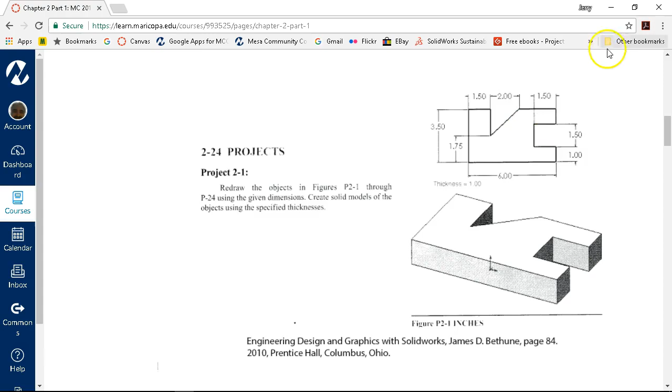So when I look at this project 2.1, I just see the rectangle and a couple of shapes knocked out of it. This lends itself to contours and regions pretty straightforward, pretty easy. So I'm going to go ahead with that strategy.

And it was an inch, so I'm in my template. One of the advantages of the template is that I've set my origin, so it's showing up in blue. I have that reference - that's the quickest way to tell that I'm not in a sketch, that it's waiting for me to do something.

Right click on the front plane, go into the sketch, and first part is the rectangle. And then I'll just be different - I'm going to hit L on the keyboard and sketch the other geometries. By this point you should be getting kind of used to the free form. Just throw a sketch up there, get some line geometry going, and as you put in the dimensions, let the sketch come back to you.

All right, so I'm pretty close on my numbers. I'm really not going to chase them that closely when I'm doing the sketching, because the dimensions will take care of that for me.

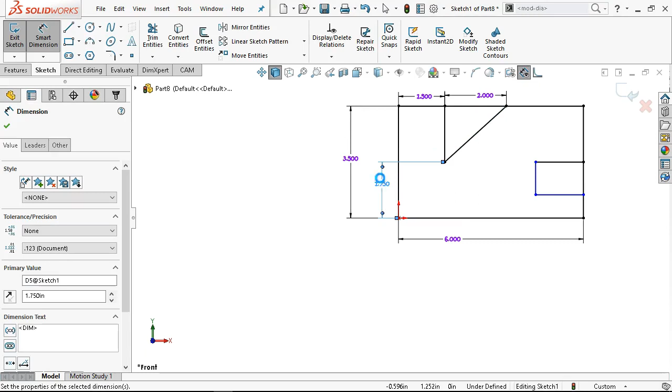Oh, and I do see that I need to go back into my template, and the fun pick that I did for the font is finally getting to me. So, dimension.

Selected dimension is driven. So let's go ahead and undo that. See what I missed here - 1 inch. Back into the smart dimension.

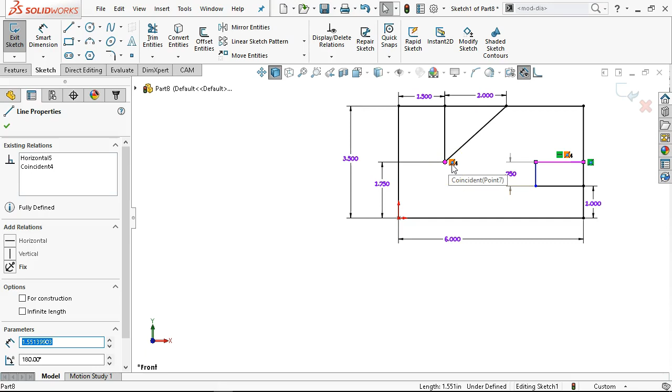Alright, so since that didn't come up with a modify box, and went for me, because I turned off or selected the do not show, what I'm getting is this gray extension line. What you would see is the pop-up box that says, do you want to make this dimension driven or leave it driving? So as soon as I see something like that, I want to check. Probably the most likely candidate is that I got a coincident to this point. So if I highlight and see anything else pop up that isn't directly related to that line or something that I intended to do, I need to make that relation go away.

So then what do I do with this dimension? Right now it's still going to be driven. I can delete it, but under other there is a checkbox to return it to driving status. All right, so in my what-if scenarios, I can switch between driven and driving on the dimensions to give me a tool to not necessarily have to pick one or the other - have one for reference, have one that is actually driving the geometry.

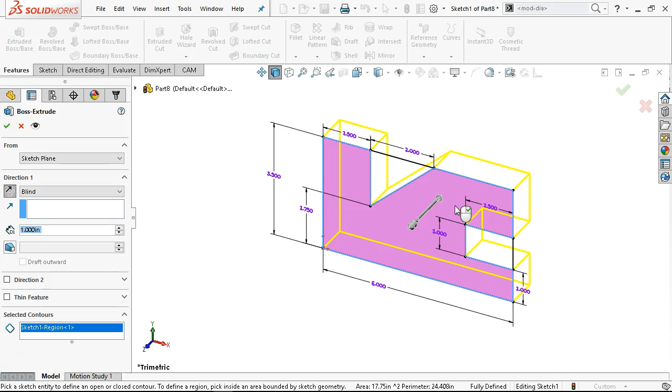And then let's see the depth, 1.5. All right, so at this point I would consider it purely optional to do the trim - if I don't have to, we'll go ahead into the Extrude Boss Base, pick the region, go ahead and drag out a little bit or set the direction depending on what we're doing. Again, the scale, as you get closer to the scale, will give you the numbers, but I'm not chasing that scale to 3 decimal places. At best, the 2 decimal places, and then it did snap to 1 inch, so we'll take the 1 inch.

And then we'll go ahead and save.

And I'll figure out where I saved. Alright, so at this point I've got a folder full of Chapter 1. This would be a good time to go ahead and make a folder for Chapter 2.

And I'll start saving to it. I'll go back into File Explorer, gather up all my Chapter 1 files, and put them into that folder. And so, 2-1.

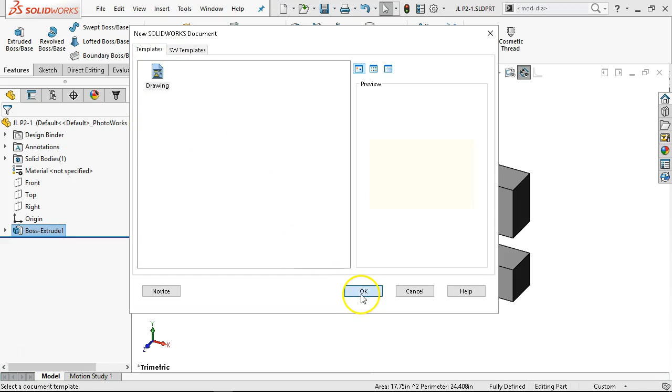Alright, taking this over into a drawing, if you want to go just single drawing at a time, make drawing from part. This is under the File pull down. Make drawing from part is a quick way. Let's stay with the default drawing template until we create one.

Alright, so again, if you have only show standard formats checked, you're only going to see the standard ISO. Uncheck that, and we'll pick landscape for this one.

Alright, so this will be kind of the accepted standard. To me, this is still taking up maybe a quarter of my sheet, and I don't really need all this information. So I'm putting eyes on the items I am going to use and things I would like to take away. As far as creating the drawings, at least initially, we're going to set a front view and then drag the other views into the mix and go ahead and accept.

The scale looks pretty good. In this case, I would probably shrink the isometric view just a little bit. As we scroll down through its property manager, we can see the scale is set to parent scale. Sheet scale would be pretty much the same, or we can put a custom scale. If that was already 1/2, then let's see, maybe 1/5 is a little small.

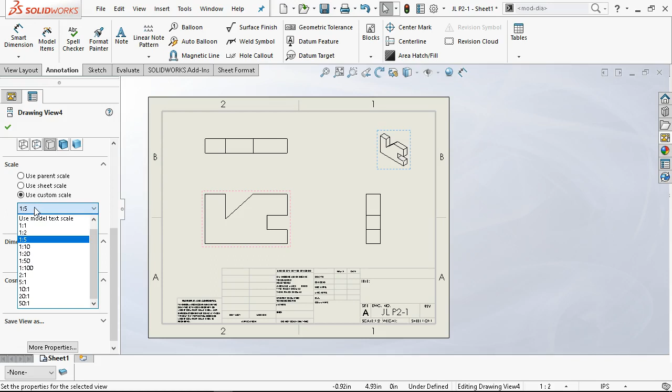And if I scroll up, I can go to user defined. User defined, there we go, make sure I click it. And pick any combination, so this time 1/3.

Putting dimensions on then is just like what we did in the sketch. So picking objects, and I'm set up still for the ISO view. Typically, if you're not going to put dimensions on a view, you don't really need that view.

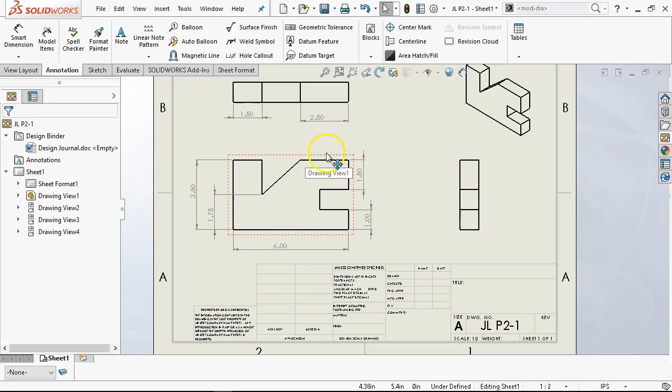And I guess my preference is still that I will have the hidden lines removed, mainly because if the drawing's not that complicated, I really don't want to see stuff that isn't going to help me. But then the other side of it is if it's really complicated, I don't want things that are going to be distracting.

If we wanted to switch to hidden lines, under the property manager again, display style, hidden lines visible, and because it will carry over into the child views, the other two views, then we'll get the hidden lines. So again, it's kind of a preference whether you want to use those or not, in my opinion.

We'll drop that one in, and then that becomes a drawing sheet. By default it picks up the same name as the file, or in the case of multi-sheet, the first file that you put into the sheet.

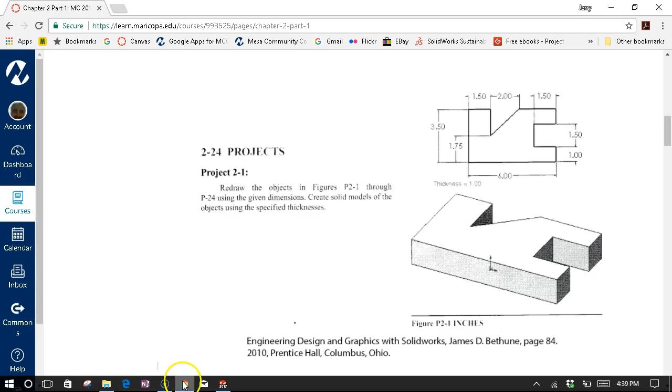Alright, jumping over to P-2-2. Kind of a strange shape. Can't really say that I would do the rectangle on this one. I think this is just going to be a bunch of lines, maybe the rectangle in the center to position. And this one is in inches as well.

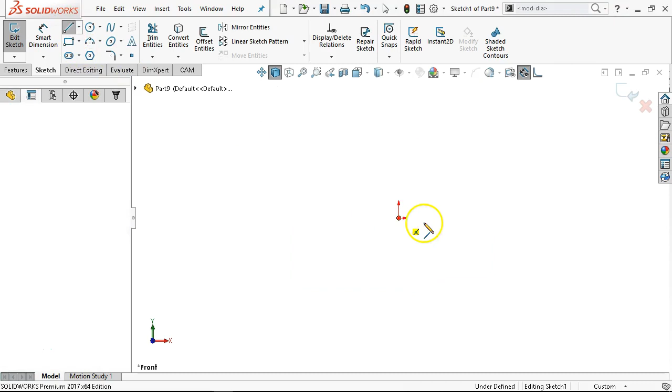And again, kind of pick a corner. So just to be different, I'm going to start on this corner. Alright, so it's kind of perpendicular, really about one of the only perpendicular lines in the group. So: over, down, over, angle.

Alright, if I'm watching those inferences, I'll pick up a few clues along the way. If not, then I expect that I will get a few relations that I'm not really wanting in the mix.

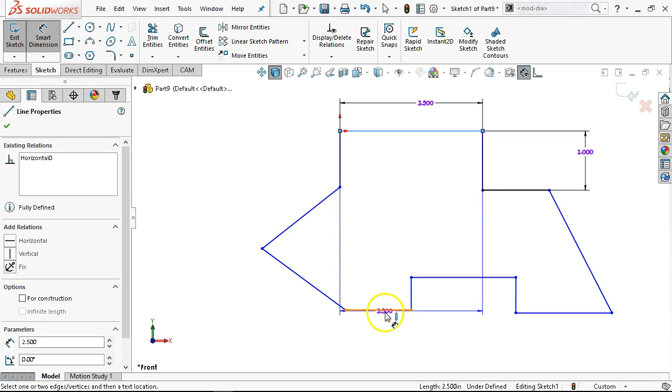Alright, so just dimension. And let's see, our overall was 4. Alright, so since I got a jump, I did not infer some relations there. So I could go ahead with the dimensioning, but the sooner I catch up to those relations, probably the better.

So again, my two choices are to select and control-select the objects, the lines in this case, and I will get a collinear relation. I could also go with the endpoint and one of the lines, and that would get me a coincident relation. Both of them will have the same net effect of causing those to share the same line, not move independent of each other.

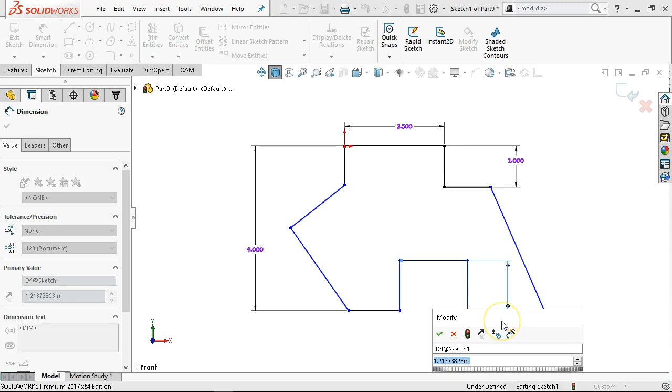Let's see, what do we have for an overall? Chain dimensions. Alright, so 0.53 looks like it. Since that was selected, that pretty much is what jumped out. 2 inches, 1.5, 1.5.

And then we get into the smart dimension, where if I stay close to the line, I get the linear. I drag down, I get the horizontal. I drag over to the side, I get the vertical. And then if we were to pick another object, another line, I would be able to generate the angle. But we're not given an angle, so we'll go with the linear distance.

And if I want to check for that angle, we can make the angle a driven dimension just so that we have it for reference.

And 1.5. All right, so what am I missing? 1 inch on this side.

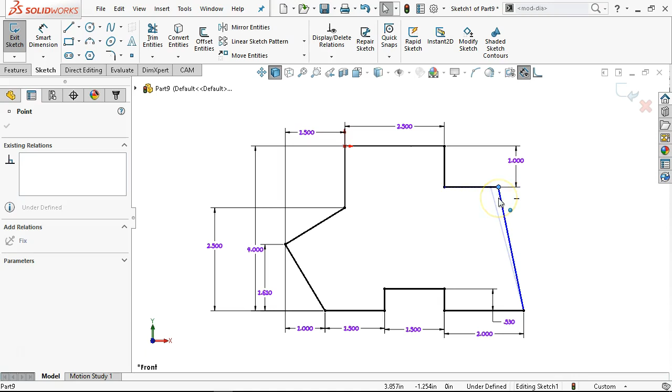So let's say that I didn't see that dimension for the 1 inch. Your best diagnostic tool again is going to be grab something that can move and see how it can move. If this was able to really rubber band, that would give me one clue. Since it only moves back and forth, I either need to look for a dimension or a relation to apply to that line or to the edge.

And then again with the four-headed arrow is asking for an extension. So if I were to pick one of those directions, that would give me an angular dimension. Don't quite want that one, so I'm going to hit escape to clear the point, and then come back to

1 inch. All right, so where that extension line is used, if I pick the point and I pick an angled line, and I say I want to extend, probably would be better along this edge as an example, but we can apply both of them.

That will place in one direction. If I go with that as a direction, then off of the linear, because of that four-headed arrow, because we're staying with the coordinate system, I can pick my angles without generating a construction line, a center line to reference to. All right, so 30.68,

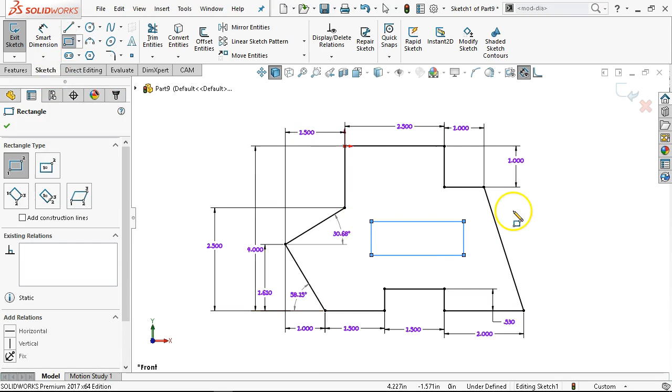58.15. Those are some interesting angles, but would really need to see what the geometry is doing to make the jump to 60 degrees, 30 degrees.

All right, so position on the rectangle, 2.5, 1 inch, 1.23, and 2 inches off of the tip. All right, so that's an interesting number.

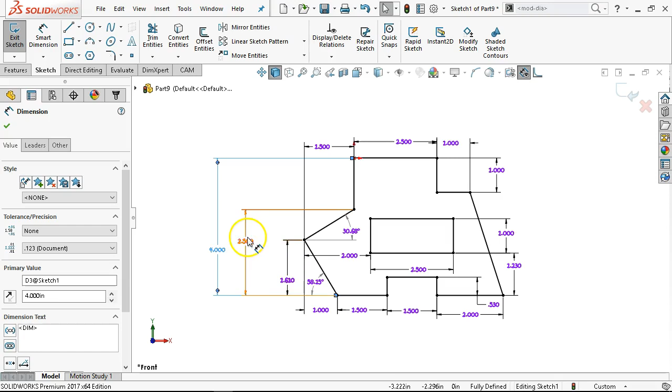All right, and again, you don't have to line your dimensions up any certain way. They should be readable. I should be able to pick pretty conveniently if there is something that I need to get into. But for the most part, wherever you place them, that's going to be fine in the sketch. Detailing is going to occur in the drawing.

Okay, and then this one is 5/8, 0.625 on our thickness. We'll save it, pick up the same naming convention.

Alright, so this time we'll go with the new drawing. Alright, so just opening up the sheet. Alright, so since this is a default template still, it's still going to ask for the sheet format and size.

So one thing to keep in mind is that I can go to custom sheet size, which 279, 216. Well, let's convert that over to inches, 11 by 8.5. And as long as I type in the IN on the end of it, it will be an inch. Except now I have a completely blank and not quite filling up the drawing view.

So if I go back to properties, again, if you don't show the properties on your right mouse button context, come down to the customize menu and make sure that properties is selected. I use that one enough. I like to see it there.

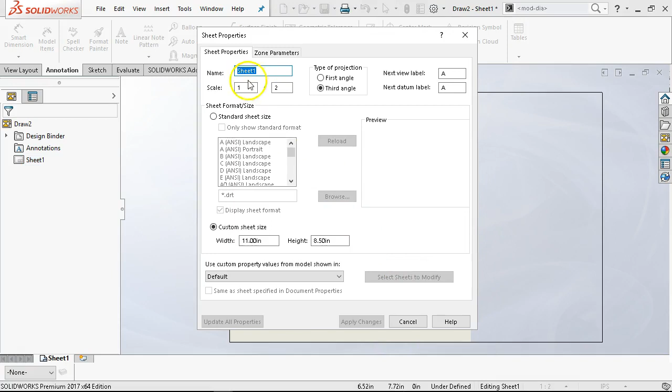So what that's going to do is let me back into this sheet properties, and I can double check that yeah, I did create the 11 by 8.5, and whatever it came back for in the inch to metric translation, the screen hasn't quite caught up yet.

So let's see what that does if we go to View Layout, pick a model view, and then that is the currently open drawing.

I have the start command when creating new drawing unchecked, so that most of the time we'll be using the view palette. When this does come up, I'd like you to be able to recognize it and know what it's doing. So, or if you prefer this method, then you would go back and check that box so that this opens automatically whenever you create a new drawing.

Alright, so advantage here is that I'm going to create multiple views, pick the views that I want. Don't need the trimetric. That was where that came from last time. Set the display style, and we're going to stay with the sheet scale. And go ahead and accept.

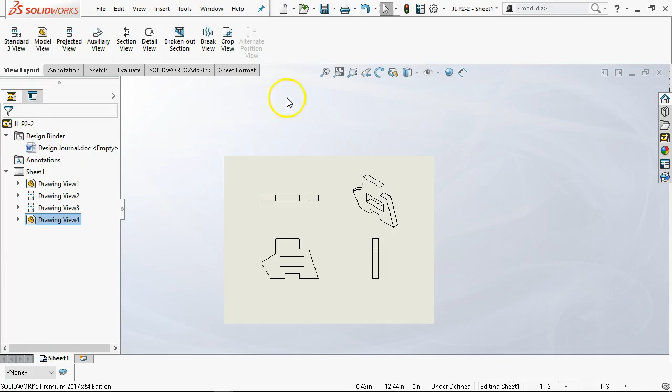Alright, so since I'm on the blank drawing, I don't really have anything to reference to, and with a 1/2 scale, that may be why.

Now it went out to 16, 29, yeah. All right, so we've got some scaling going on there. So be careful with the sheet scale. I'm going to have to do the conversion for the 215 and the 279, see what it came up as. All right, so we'll come back to that one when I figure out what I actually told it to do there.

All right, so we can close those out. All right, going into the next one.

If you have the 2010 book, this drawing was for like 223. I copied and pasted this out of the 2014 book so that you'd have reference.

So these got kind of mixed up in the text. And if my mouse will cooperate here, looking at this, we could go either way with the rectangle and a couple of notches, staying with the regions. Probably about as fast to go ahead with the sketch.

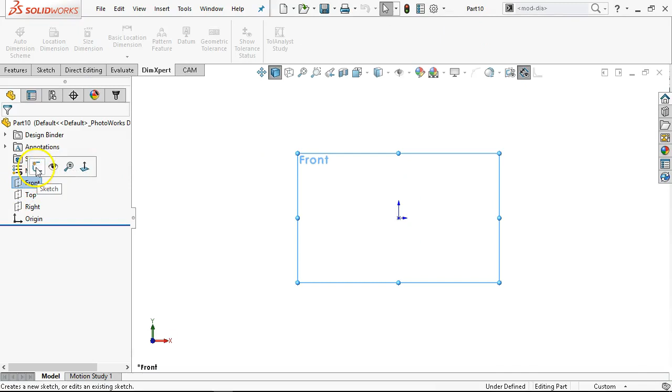All right, so bottom left corner, and really the point that I wanted to make earlier about picking a location, whatever looks good. I mean, you're not locked into having to put every one of these parts on the lower left corner of the part.

If you pick or experiment, or have a good reason, or even not a good reason, to place the origin someplace else, just experiment with

what can work there. All right, so I'm looking for that inference line. Back to the origin, and then up, over, back, and down, looking for the other inference line.

And from last time, I know that I didn't quite get coincident, but that particular inference line put me coincident with the origin. And then that other inference line also coincident to the origin. So now if I try to move this line, it will go back and forth, not up and down.

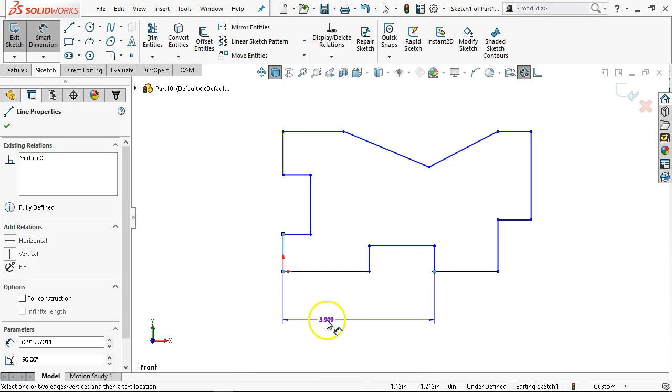So in that case, I was able to, as I was going through the process, have the software infer as I went, but that's not always going to be the case. So just be prepared to go add relations as you need them, and apparently the origin is still selected, or something's still selected.

All right, and our dimensions then: half inch, 2 inches, and there was an inversion, so let's see what it does when it goes to 3.5.

All right, so a few strange things going on, but not too bad. Overall of 6 inches.

So as I'm adding these dimensions and it's doing a few strange things, we're just kind of going through the process and letting it catch up.

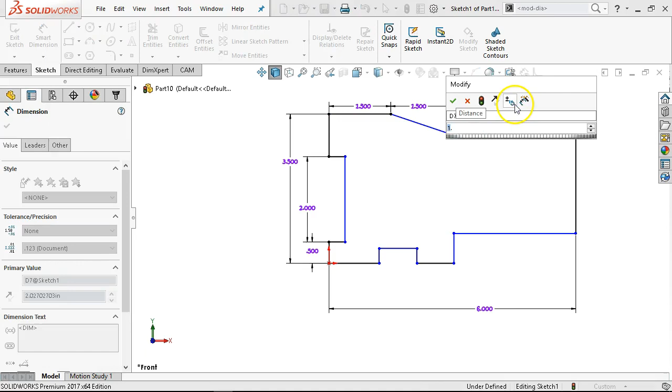All right, so both of those were 1.5. So just double clicking on the dimension gets it back. 1.5, and then a depth of 0.75.

All right, so there's one that didn't quite make collinear. What do we have? 1.75. And the small dimension, 0.5.

And 2.25, well, in here, so go ahead with the 0.75. And then the 2 inches. And 1 inch for the height.

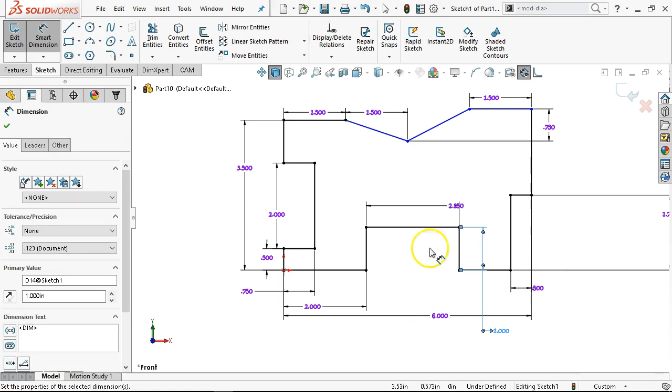Okay, so at this point I think I've put in all of the dimensions, even the ones that got thrown out. And looking at this as a movable item, right? So it moves pretty much the whole thing up and down.

So this is another place where I would be looking at collinear. So instead of the endpoint in the line, I'm going to go line to line. And in the pop-up box, we'll go with make collinear. That brings it to fully defined.

And our thickness here, not given, so make one up. And we'll save that.

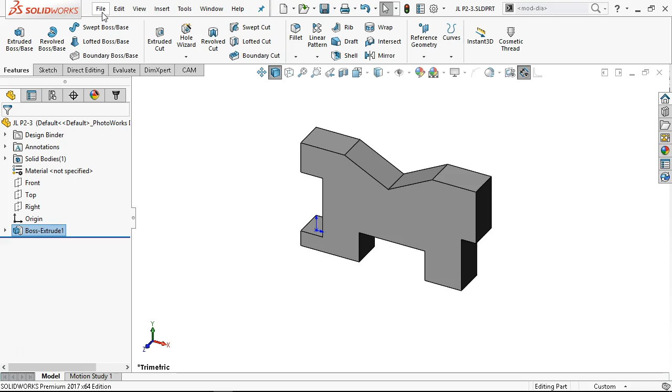Okay, so let's see, we had the two. So I think probably more out of habit, I will end up in the new for the templates.

And the drawing will stay with the standard sheet size after last time, and go ahead with it. And then let's see, we did the view layout model view, which is the same as insert drawing view model.

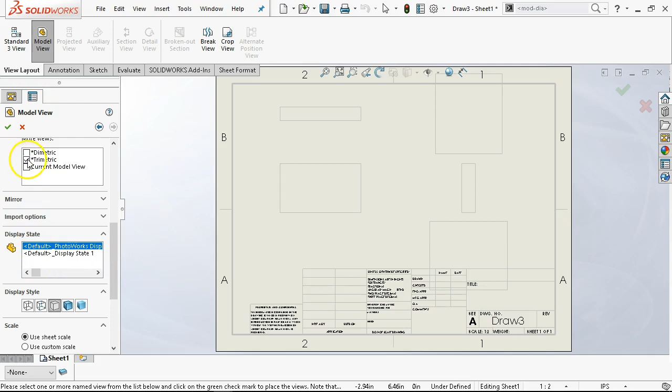Right, so basically the same exact command, just a different way to get to it. And we're going to create the multiple views. Pick the four. I wonder why the trimetric is staying active on mine there. And go ahead and accept.

All right, so even if I don't need all these views, I decide that I can place the dimensions, and I really didn't need the right view. Highlight it so that it's in orange. Hit delete on the keyboard.

It'll come up and say, 'Are you sure?' And then it goes away. If I decide I need it back, well, at this point I could hit Control Z.

If I don't put it in there, then probably the easiest way to create the next one is going to be a projected view. So off of that front view, I can do a projected view, and this will set the alignment. All right, so the front view is always the primary or the highest level view.

The right view and the top view will follow it. The top view is able to go up and down, not left and right, so it maintains its alignment. The right view can go left to right, but not up and down, so it also maintains its alignment.

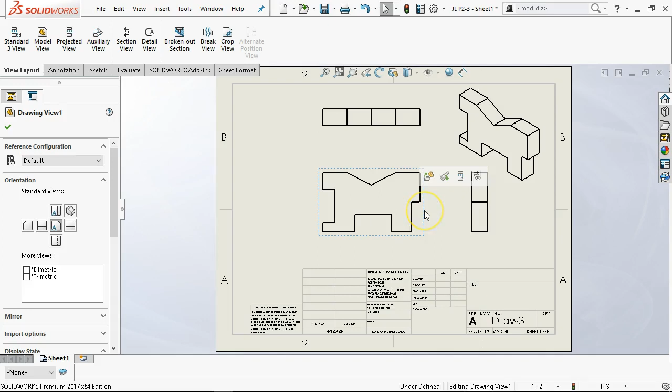If I created just a new view by selection and did not place it where it was going to be projected or pick up the alignment, I would have to assign the alignment manually.

So let's see how I can generate one of those. I pull up the view, let's grab a left view. There's the preview showing me that it's going to get alignment, I see that dashed line. If I place it anywhere else, it's not aligned.

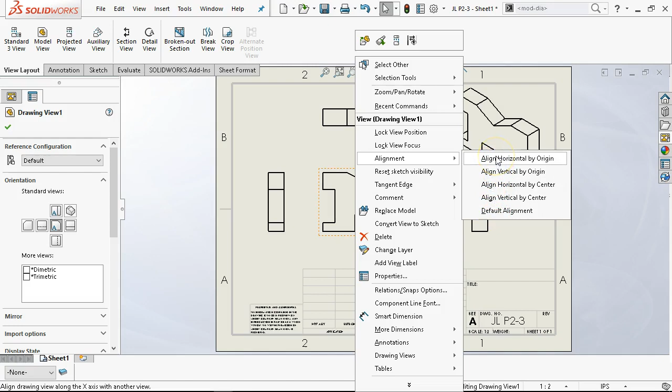Okay, so I get it close, and then I select which one I want to be the primary view. For the alignment, there are options: align horizontal by origin, vertical by origin, horizontal by center, vertical by center, or default. Probably in this case horizontal by origin, then pick the view, and then one of these moves.

I got it backwards, I made it so that this one is the primary and the others are following it. So just be careful with the alignment. It's not that big of a deal, but it can have an effect.

All right, into the annotations. We talked a little bit about the purple dimensions. So under model items, I have a selected feature, and I want the entire model.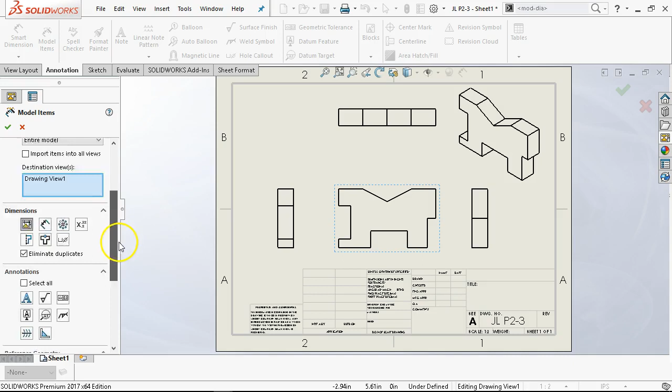A lot of times this comes in as just a big blob of dimensions. Since I have not marked any for drawing, I don't expect anything to come in - but this is where I would see those. No dimensions are inserted, and if we go back and pick up the model items again, they're not marked for drawing.

Okay, all of the dimensions that I included in that view - since there was one sketch with all the dimensions, that was convenient to draw it that way, but it does not make it convenient to manufacture.

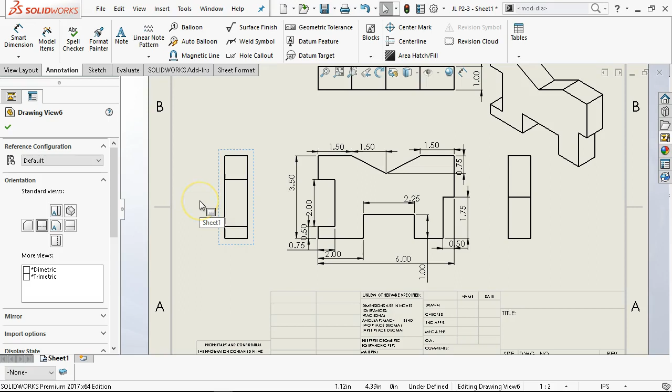Or if I'm going to send this out for a quote or whatever the end process is, I don't know that I would use the sketch dimensions. So let's see if I can undo those - there they go.

All right, so again, going back into the smart dimension, placing the dimensions that make sense to me, placing them where I want them, being able to pick outside of the other views, and basically going through the process. Angles work the same way as they do in the sketch, pretty much.

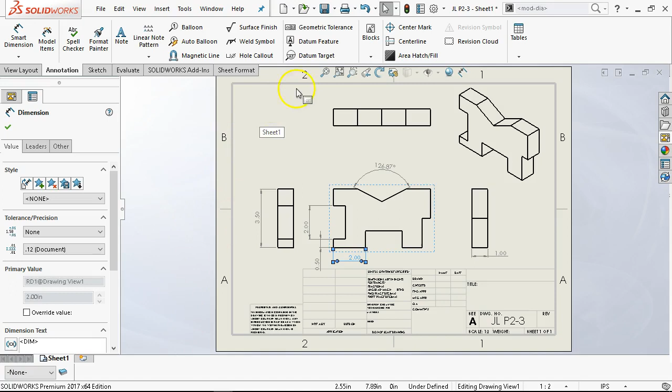All right, so a few dimensions on that one. I'm going to leave this one open - this is going to, let's see, I'll put a couple in here, so 2-3 to 5. Whatever the next couple of items will be will go into this same mix. If we go one sheet, one part, one sheet, one part, that is a strategy.

The downside is that to print those, I have to either open or select print on each one individually. To make this more like a drawing package - so I have a subassembly, and the subassembly in the drawing package contains all of the parts necessary to build up that subassembly - I would like to have a multi-sheet drawing.

So we don't really have a subassembly here, but we'll consider that the next couple of parts are going to be part of the same group.

Oh, 2-3 gets a little interesting with the pattern. This is probably a good one to look at for our pattern. Could also do this as a mirror, or could do this as contours and regions.

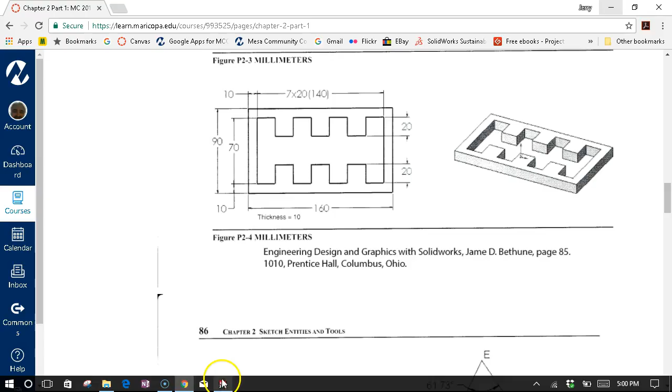Okay, so back into the file, new. Let's go with the rectangle.

Since this is going to be center line, this would be a good place to use the center rectangle. Doing the pull down, we've been doing the corner rectangle, but the center rectangle has two options now - from the corners or from the midpoints. Since I'm going to mirror across the horizontal and the vertical, I'm going to go from midpoints and drag out from that center location.

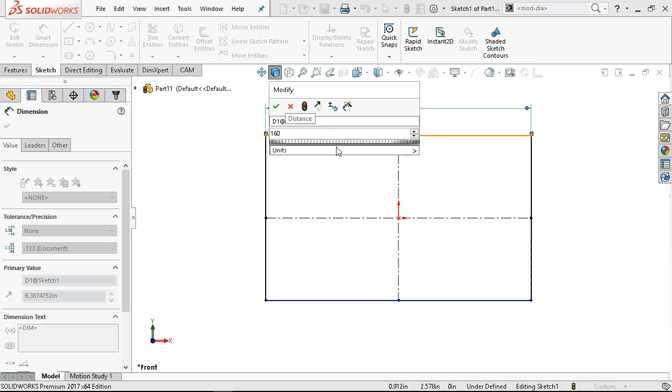So in that one command, I get the items that I really wanted, needed to start the sketch. Oh, and since I'm not in metric like I said I should be, we're going to go 160 mm since I'm already in the command, and then I'll switch it back to millimeters, grams, and seconds.

That kicks me out of the sketch. Go back into the sketch and continue with the dimensions.

And our overall is 90. Alright, so we'll zoom up in this quadrant, and we'll go up, over, down, over, up.

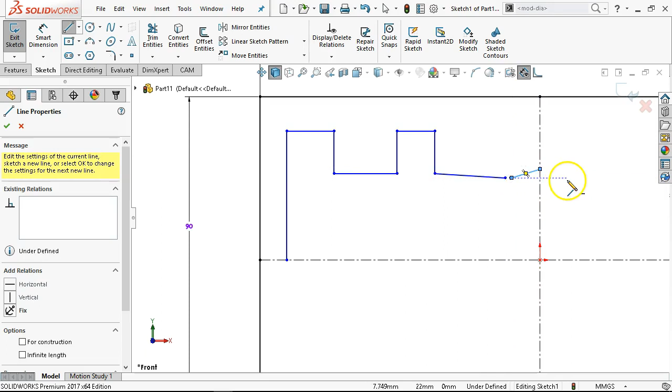Let's see, one more, or half of one. Okay, half of one. Up, and I stuttered there, so Control Z. There's one of those really tiny little line segments.

All right, so I got a little button happy there for sure. That one needs to go away, or it's going to be one of the items that causes this to not go fully defined. All right, so everything is shown as 20, 7 times 20.

And so in this case, I would like to window pick from left to right and get all of those items and make them equal. Interesting result. That wasn't quite what I had in mind.

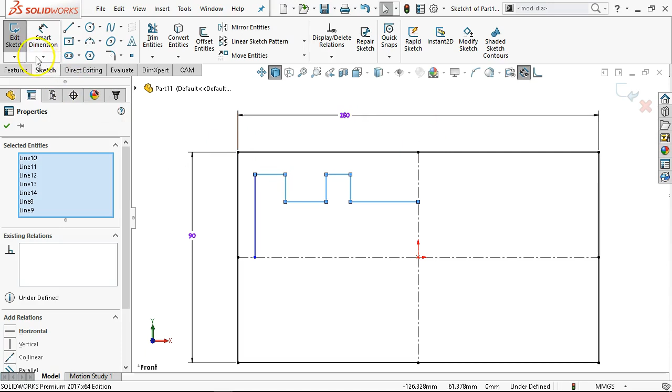Alright, so we'll back that up just a little bit. Let's see, my first, well, let's go ahead and put the dimension on one of them. 7 times 20. Alright, so 20. And we'll go with the vertical, 20.

Set a collinear. Since those didn't play well, we'll go collinear. And then now we'll try to set them all equal. And I got an extension line? No.

Okay. Not sure what's keeping that from making the selection. Oh, yeah, okay. So yeah, the end line would be the half line. All right, thank you.

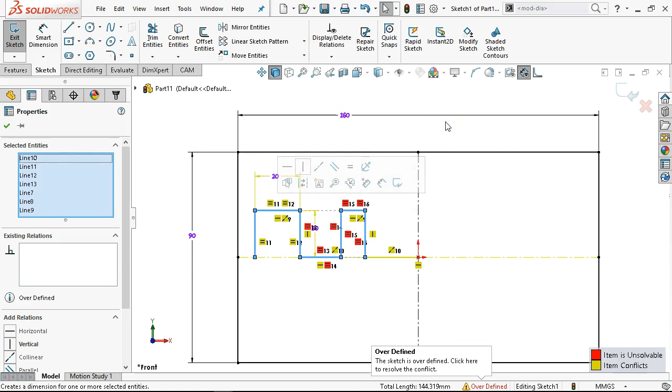All right. Nice. All right, so let's see what kind of paint corners I can paint myself into with this one. All right, so the overall on this was 70. Let's add another dimension. All right, so again with the half dimension and the full dimension, I can come to the opposite side of the center line, and we can go 70.

So if we bring this in close enough, oh, okay, so that one went, and we had an overall of 140, and that should be 70 because I picked up the half.

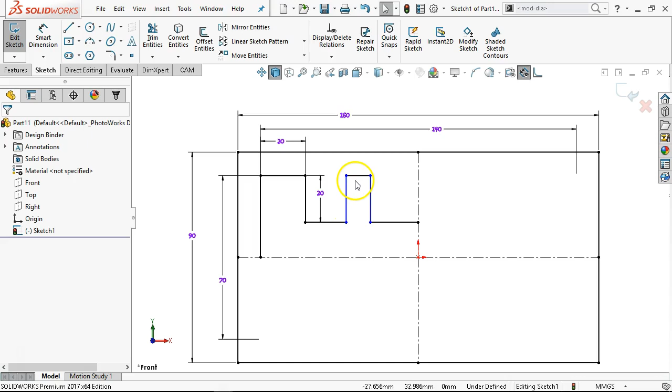All right, so if I still wanted to see that as the full dimension, we can go back to the leaders, and it's going to show as radial and diametral. But pretty much think of it in terms of we're not going to revolve this, so it's really the diametral that I'm interested in. I can force it to think of it in terms of the full dimension. All right, so at this case, it looks like I need 1 or 2.

All right, so made a couple of assumptions, got tangled up a couple times, but still work through the process, add a few more dimensions, think about where this is going to end up.

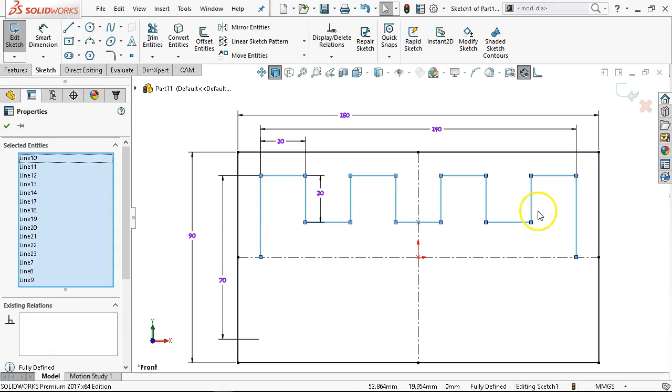All right, so here's a case where I don't really want to select individuals. So I can right-click on one of the objects and anything connected to it by select chain. We'll pick everything in those segments, and then we can go mirror entities, and that'll give me the shape.

So pretty much at the connection points. Okay, so the little point, those were put in automatically by the mirror. They're not hurting anything. If you don't like them, you can delete them. It's more of a reminder that you mirrored. Okay, so it's not really that big of a deal.

Okay, 10 millimeters. And we'll save as P2-4.

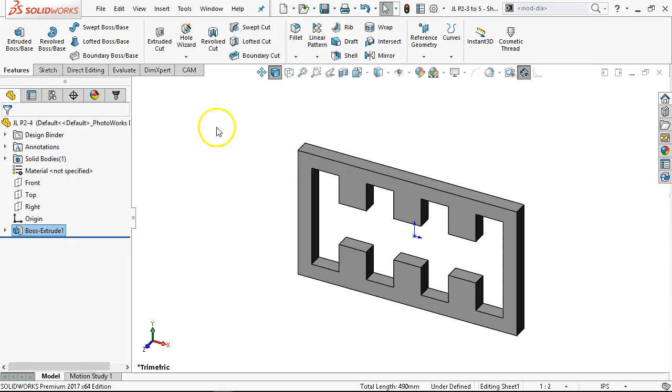All right, and then I can switch back to my sheet. And at the bottom left, next to sheet 1, is a button for Add Sheet. All right, that will find the exact same sheet format, or if it can't find the exact same sheet format, for some different reasons, it may not be able to locate it. It will ask you which sheet format you want to use, take you back into the properties.

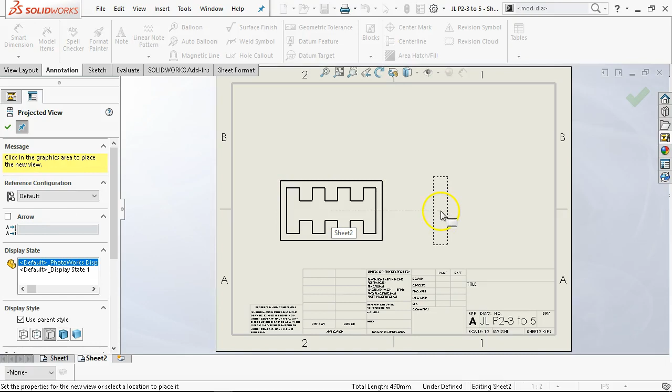All right, so let's go with the view palette, and we'll pick up. Nope, I didn't want to open that. That one should still be open. 2-4. It updates. You can drag out the front view, and in this case, a right view and the isometric view. Top view is not going to really help anything. So, other than considering the sheet space, maybe the top view would be a little bit better fit, but.

Let's see, the other thing that comes up is, what if I wanted to rotate this view? We drew it in one sketch. I don't know that this lends itself to being rotated, but with the primary view selected before I apply any dimensions, I can go up to the rotate on the heads-up display and tell it this is going to rotate 90 degrees and apply it. And it's going to be affected.

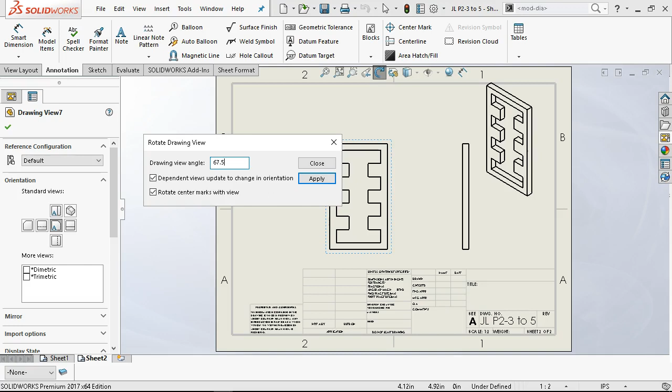Yes, we know it's going to stretch. It's going to update and change those other views. If you wanted a weird number, it will do the weird number and figure out the isometric.

All right, so 90, and I'm sure that rotate is somewhere else. If anybody runs across it, please let me know, because I haven't been able to find it. I've always just gone up to the heads up and done the rotate view.

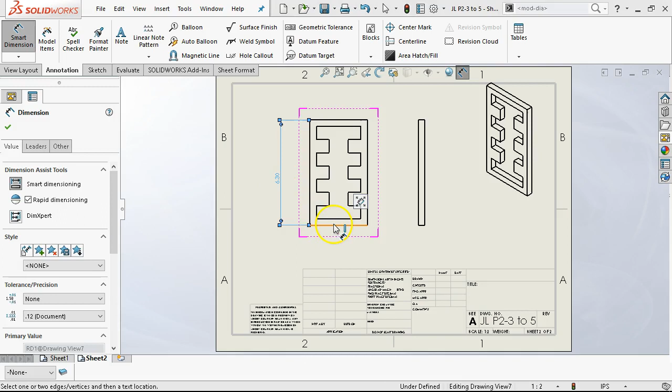All right, so that gives us a little bit different take on it. Put in our dimensions. I want it flipped back into inches, so we'll save that one.

All right, so looking at the window of open items, or the Windows pull down, these will be the open items. I kind of go up there by habit. I don't know that I pointed that out. A couple of versions ago, they made it so that you could open the folder that file is located in, or close it directly out of the list. So I don't need to leave the sheet to close the file.

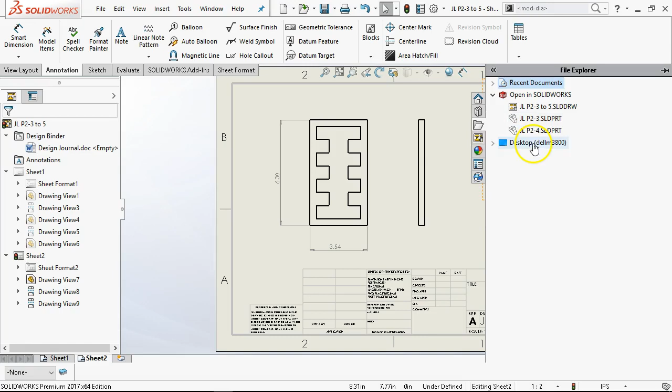On the other side of that, then, is under our Explorer, recent documents, items that are open. So the current file, the last two are shown grayed out. They're still in memory, residing in memory, haven't been fully kicked out, but they're not currently open documents.

So that's kind of a useful piece of information if I see that my system's slowing down and I've opened up a lot of things. It may be time to save whatever I'm doing, close SolidWorks, and reopen it. Now with the memory and capabilities of the newer computers, it's not as much of an issue, but you can have enough open documents that it will start to drag down your system.

One of the things you want to watch out for, even when we create the title block, is if I have a 1 meg JPEG in the corner for our company logo, that's 1 meg for this sheet, 1 meg for the next sheet, 1 meg for the next sheet, and you get out 20 sheets and wonder why you have a 20 meg drawing file that should only be about a meg at most. It's not as critical, but there are places where it's going to sneak up and can be problematic.

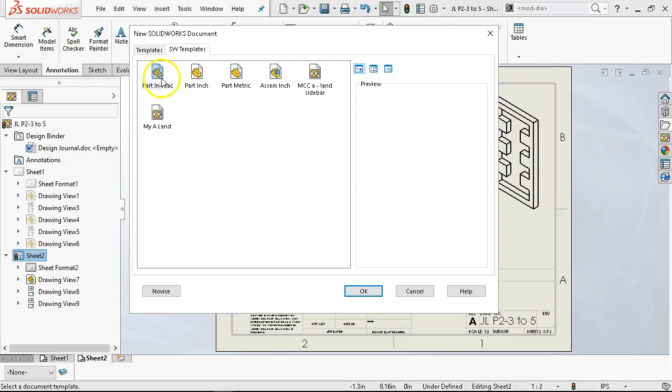2-5 is in inches, and it comes with the note. Let me switch over here. It comes with the note that results may vary due to rounding error depending on which way you go around in dimensioning or going around the block. You may get a different result than somebody else would.

All right, so looking at the angles, this is pretty much all of the angles that we would want to be able to find. Also need to be aware of the included, the opposite interiors, the opposite exteriors, all of those fun geometry things, and what we can get away with here.

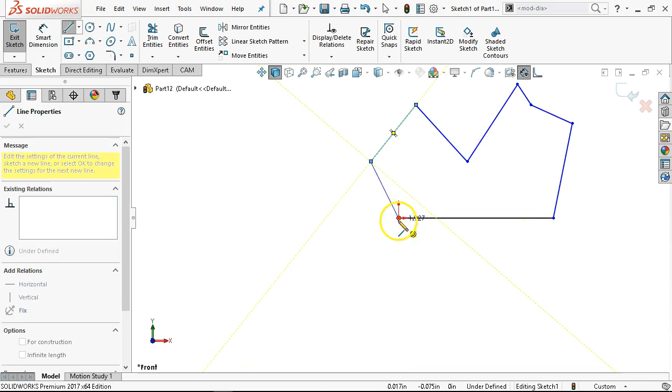All right, so front plane, sketch, line. Let's see, A to B is 5 inches, so that's pretty close. And also watching that as we get more geometry, we're going to get more inferences, and those inferences, if they take over, we'll have to go back and get rid of them. All right, so something like that. Don't think I missed anything too bad. All right, so 5 inches.

B to C, and because these are linear dimensions, want to stay close to the line and make sure that it is staying linear, not vertical, not horizontal. All right, 3.8376.

All right, and then D to C. So same thing, CD. Come on, get a little close. Nope, maybe. There we go. 1.5403.

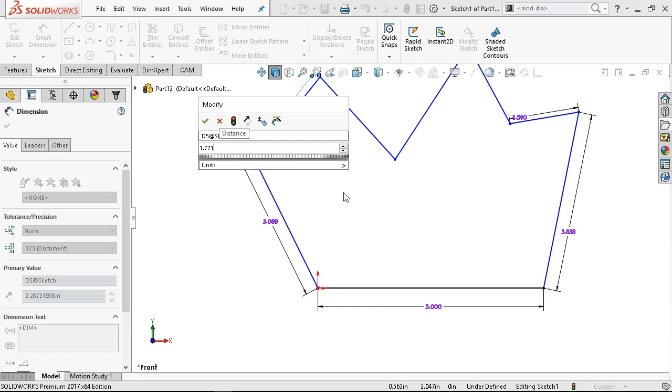Now jump over to HA, 3.0881. And then GH, 1.7713. And then G to F, FG, 2.3679. I think it's more results may vary because entering all those numbers. E to F.

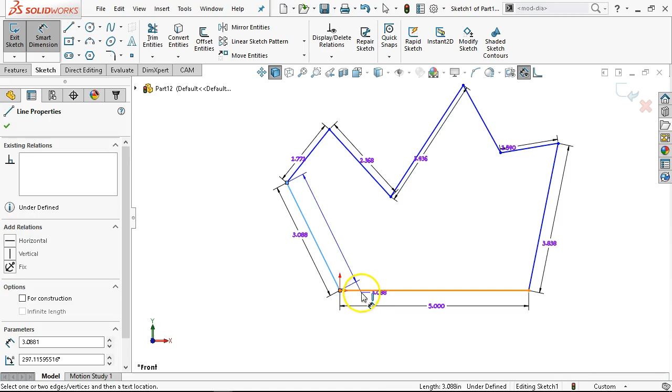Okay, and then they're asking for DE and the angle CDE up here. So, hopefully the angles will draw that in. All right, so most of these are going to be straight. Pick between the two object lines, place for the angle, so anything that's not parallel is going to generate an angle.

111.69, 100.1, and then 94.07. Okay, if I can type here, 94.07.

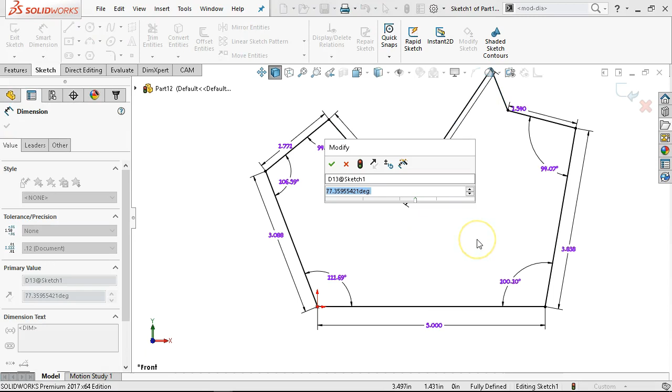.59, .11, and then 68.47. Right, so I get the exterior, but because they're opposites, they should be 68.47.

And we can double check that by putting in a couple of construction lines. Okay, it's just so that they're connected. Tell it that it's collinear. Okay, a little close to my extension line. And this will generate that driven dimension showing that we're opposite angles.

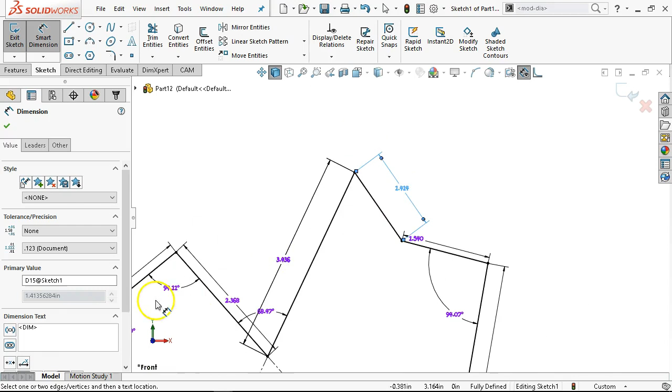Okay, so the length that we're interested in is D to E. It's also going to be a driven dimension. So I got 1 point, okay, can't even read my own numbers, 4135. And then the angle, grab the midpoint there, how about that? 61.7.

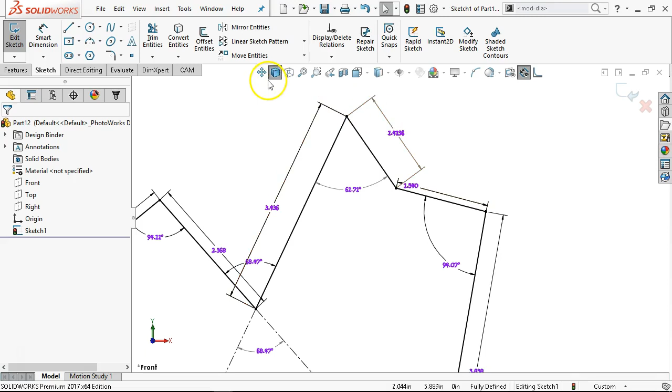Alright, so in this case, since everything else was set to 4 decimal places, I could do an individual override. So pretty much just the answer since we put all of those in. And tolerance precision, well, we're not really setting a plus minus, and it's set for the document. I can override it to go to 4 decimal places just on that one dimension if I need it. If we wanted all of them, that would be a good time to go into edit document units, find the inches, and take them out as far as you need.

And then everything, well, since that's just off my screen, then everything should update to 4 decimal places. So I'm looking down through here and seeing what I typed in and how close I got. We'll kind of go from there. 1.25. All right, so it's not so much that you're worried about what those last 2 numbers are. It's going through the process, setting the angles, picking up those numbers, dealing with the 4 decimal places. And 2.5.

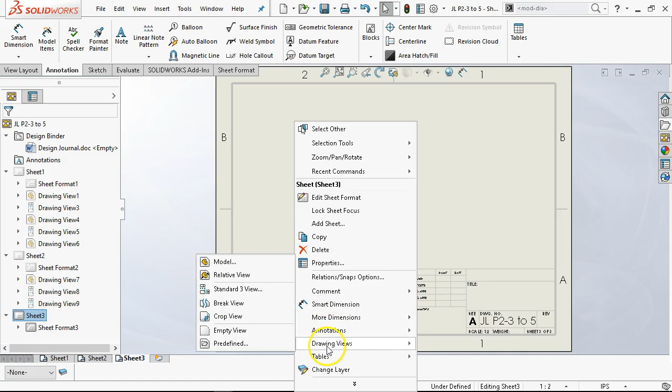All right, so back over to our drawing sheet. Add an additional, add a sheet. Let's see, well, there's the other add sheet if you don't like the little button. I was going to look and see if it would let me pick, there it is. So about 3/4 of the way down, drawing views, model. And then that's going to take me back into the property manager.

And I still got the trimetric, so that must have gotten saved with the template. So that drawing view can go away. Not real fond of that scale, so the global scale, let's go to 1/4. Okay, that might have been a little small. All right, and then we can go through and start putting in the dimensions.

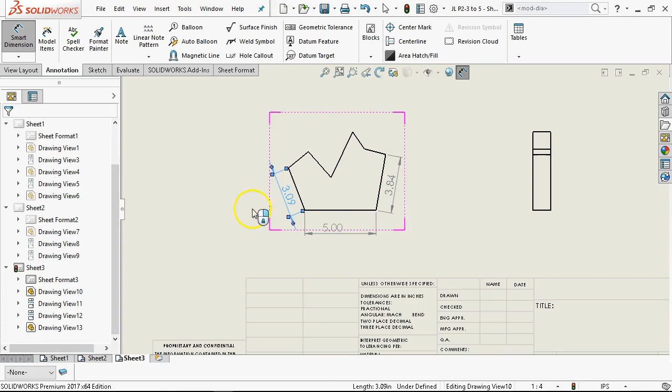It's like we did, yes. Oh, those are, let's see if I can find it. That is, one of them is a pop-up, and the other one, let's see if I can find it. All right, so positioning, actually I've never paid attention, I've never paid that close attention to them. So let's double check, I think you're picking the dimension if you're not placing. It's showing you which side of the line it's going to place it on.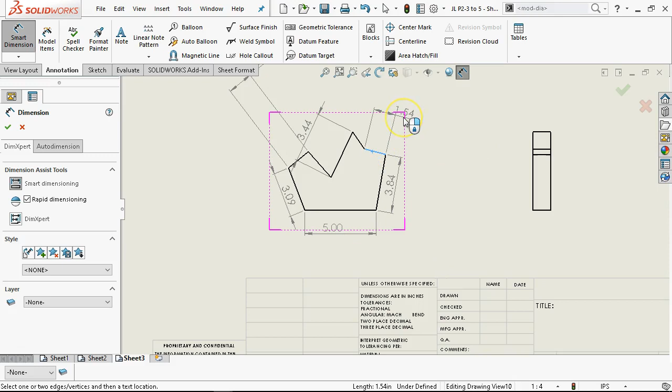So even though there's some distance between the extension line and the object, it's still giving you a reference. So after that initial, now I've lost it, I'm not getting it back apparently. So one side, the other side, and then once it's placed, hovering over, that will be kind of the same properties as what's going on over here in the list in the property manager.

So a quicker way to get to properties around putting in text and having it show up. All right, so again, I have a lot of habits, I have a lot of years to develop a lot of habits. So some of the things are just quicker because that's the way that I've always done it.

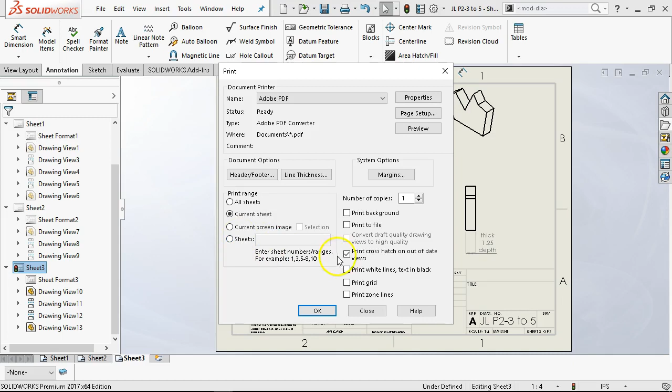All right, so at this point, I have the drawing sheet. Now, when I want to print, I can come up to my print settings, just the current sheet, all sheets, or individual sheets, as opposed to opening each one or right-clicking on it and saying print. Have SolidWorks launch the model, do whatever it needs to do to calculate the print, and then send it to the printer.

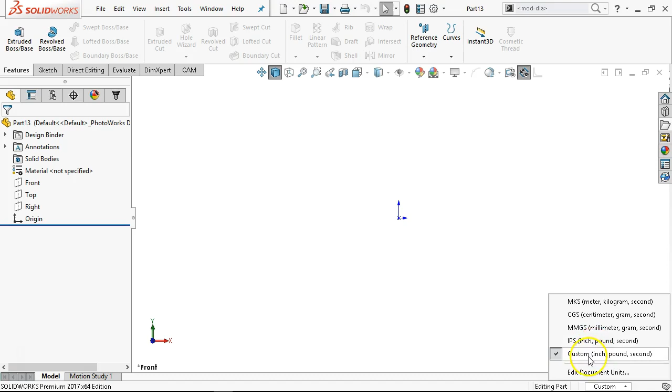All right, so 2.6 we'll finish up with is pretty much the same with the angles and the dimensions. Again, some of the opposite angles, and unfortunately, there's not too many here that lend themselves to the little four-headed arrow. But well, let's just see what we get. All right, and after doing that, then these were in metric. All right, so we'll just go back to millimeters, grams, and seconds. It'll kick me out. Sketch.

All right, so up, over. See if I can get some good inferences going on. So there was a parallel. That one kind of comes back and goes out, and then over and back.

All right, so since I wasn't watching my inferences, there's no horizontal showing up in the existing relations, no little green box underneath the line to tell me that it's horizontal. So I'm going to apply that relation myself.

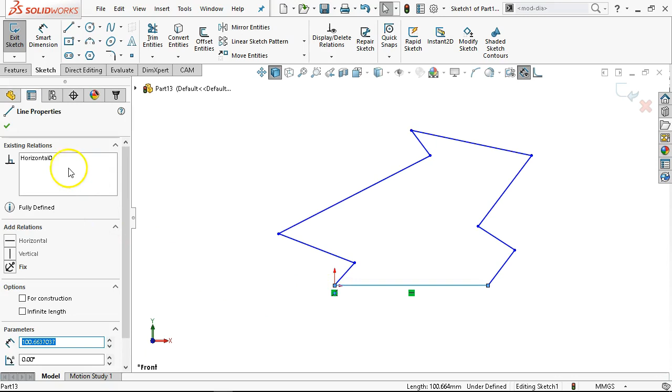All right, so now I have the little green box. When I hover over it, it turns orange. When I select it, it turns blue. And then from the property manager, existing relations horizontal. Didn't know that would cause it to go to magenta. So all kinds of fun colors going on with just those little relations.

All right, so 130. And B to C is 28.2. C to D 40.6.

And it is kind of interesting that that split circle is not showing up with the sketching. It's kind of relying on you to place the dimension, or it doesn't see it as critical.

111, 133.9, and that was a miss.

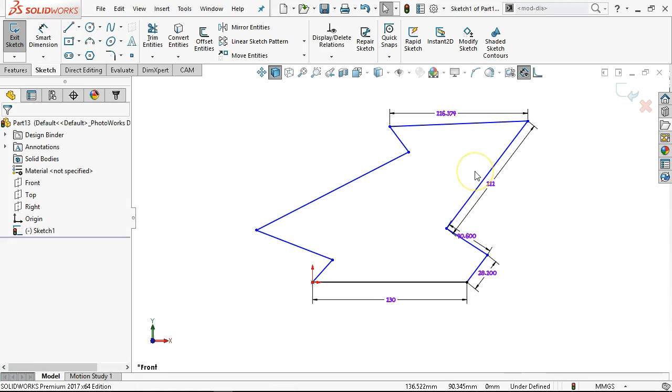All right, so the line has a little bit of an angle to it, and actually has a little bit of up angle to it, but the dimension itself is linear or horizontal. Oops, didn't want to. Control Z again. Cutting it didn't really help.

All right, so linear dimension, 133.9.

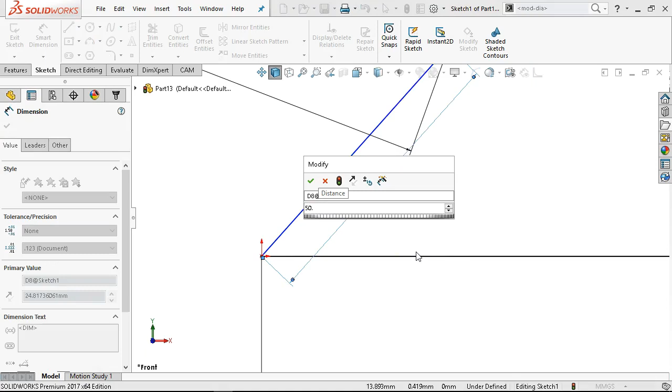Let's see, FG is the question mark. GH goes to 114. And then HJ 70.6, and JA 56.7. So I'm going to zoom up on that one using the middle scroll wheel just to make sure that I'm placing it a little better. 6.7. All right. So nothing got, okay, got a little crazy.

All right, so if you pick the endpoint again and the angle, that's what's going to give you the arrows. The arrow coming out at 0 degrees is going to be the same as picking the line. I guess the reference or the reason that we would want that extension is if we didn't have anything perpendicular or located conveniently

to the origin or in reference to that geometry. So it creates an extension line in a direction that hopefully will help us out.

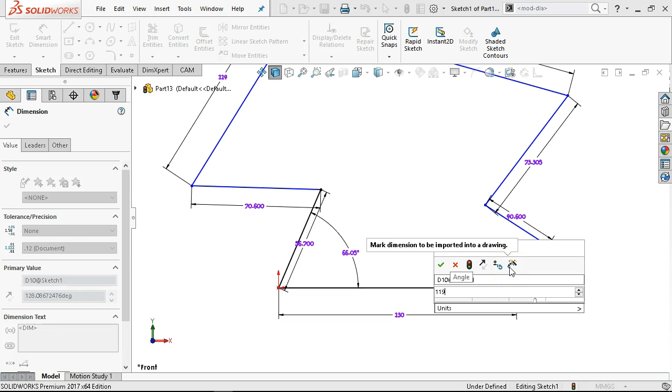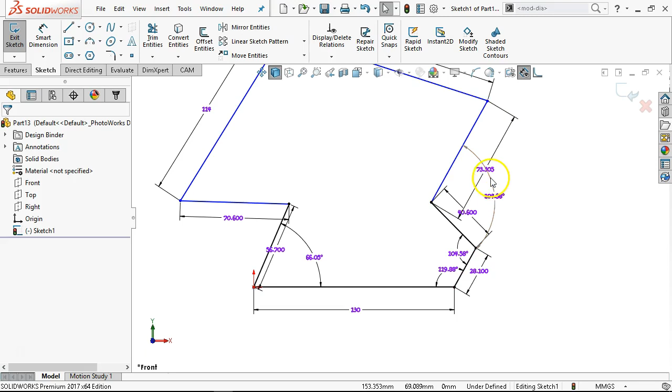And for my dimension, again with the don't show, it went right to driven. All right, so there's a parallel that I didn't expect. Well, I kind of saw it. Highlight, showed up when it shows up in blue, and then the choice is to delete and reapply, or just select and come over to other and send it back to being the driving dimension.

All right, 64.2. And okay, that one's just a little weird. A little lost maybe. See if we can kind of drag that one back around. No.

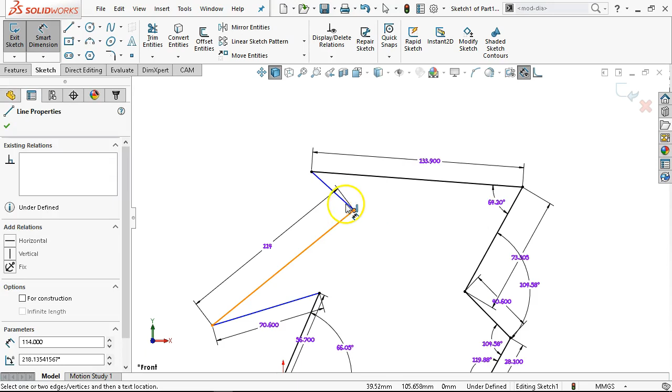All right, so had the endpoint selected. Oh, got out of my dimension by hitting escape. Five. Well, I guess we're gonna have to get the rest of these in here and see what they look like. 85.38.

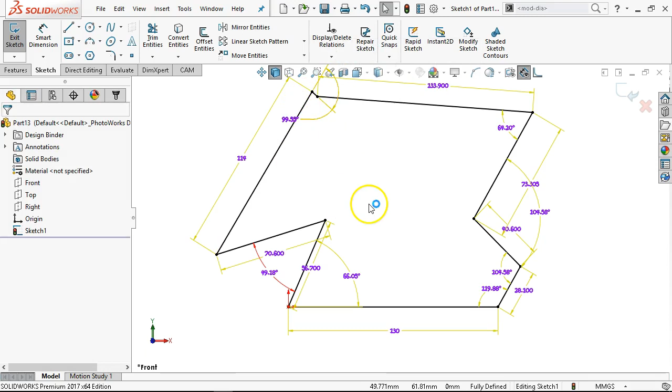And over defining geometry. So either once again, all right, and at that point I'm not getting, well, at least it's not showing me. So let's bypass and we will go look for angles, no relation, and an angle.

114. All right, so that one, nope, 99.55. See if we'll take that one, 48.95.

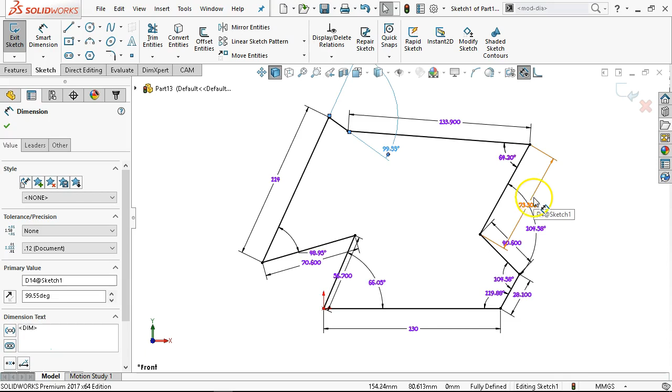All right, so it really doesn't like one of the dimensions that I gave it. All right, 133. All right, so DE 111.

Okay, that looks a little better. So either when I was messing around with the driven dimension or placing those, I missed one.

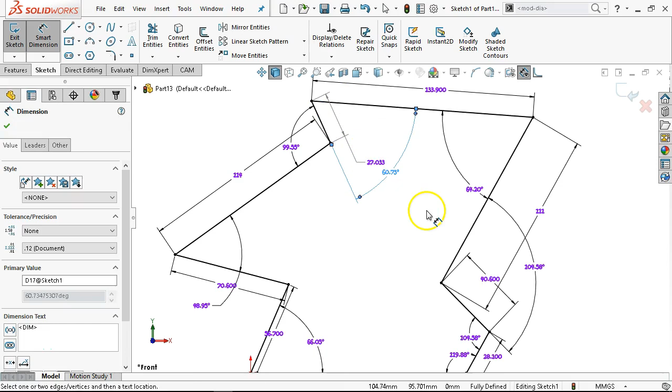All right, so we're interested in F to G, and we'll find a place for it here. Okay, so again, I have it set to go automatically into a driven dimension. And then the angle EFG at 60.73 and 27.03. And then thickness is 12.

All right, so if you can work through the objects that want to invert, the dimensions, the too many relations, not enough relations, that's kind of the purpose as far as I'm concerned, getting you into that mindset that nothing this throws up at you in the way of over-defining or cannot resolve is super critical. You're going to have to work back through the process to figure out what caused it, but it's all solvable, it's all doable.